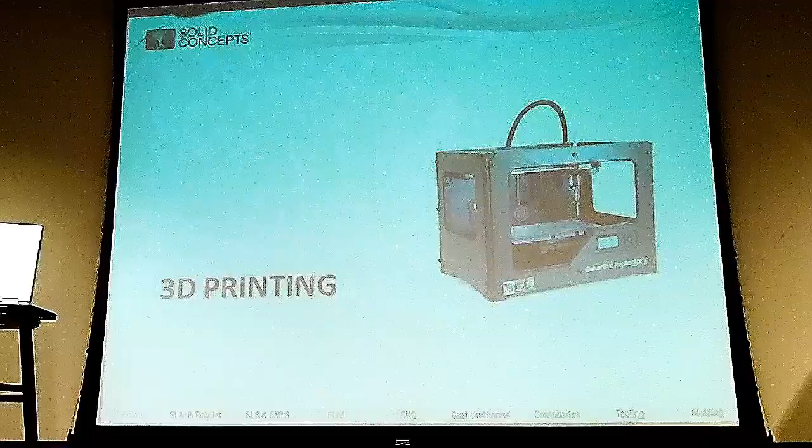Prototyping and 3D printing. It's been around for a while, but we're going to go into a little bit about what it does and what it doesn't do. So 3D printing, I don't know if you've seen it a lot in the news, but there seems to be a lot of hype on it, a lot of talk about it. What is it? What is it not?

And Gartner put together this group of technology and their expectations, and you start with a technology trigger, and you go into the peak of inflated expectations, the disillusionment, and the slope of enlightenment as it gets to actually a full production. So right now, 3D printing is right there. So there's a lot of claims out there, there's a lot of discussions.

Computer? No, the computer. Oh, thank you.

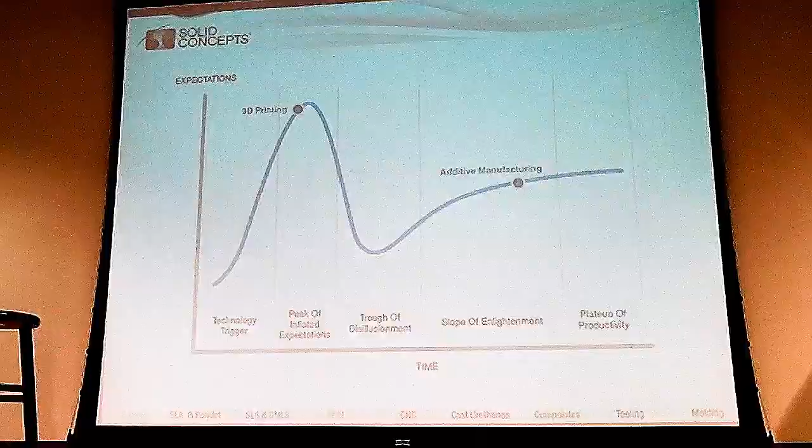There's a lot of discussions as to what it can do, what it can't do. You see things in the press every day claiming all these great claims. Now, one aspect of this is 3D printing, which is more of the desktop, has been around for a very short time, but additive manufacturing as a whole has been around for 20 plus years, SLA, SLS, etc.

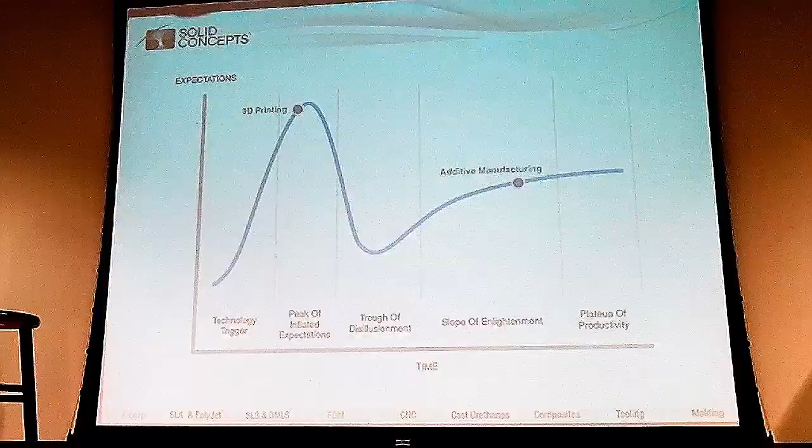And so, as you look at this, you can see the differences, and what I'm going to be concentrating on today is more additive manufacturing rather than the actual small 3D printers. They have their place in society, and they will grow, but additive manufacturing, which is more the commercial aspect, is what I'm going to be talking about today. So that's just the graph, the Gartner group, the different parts of it.

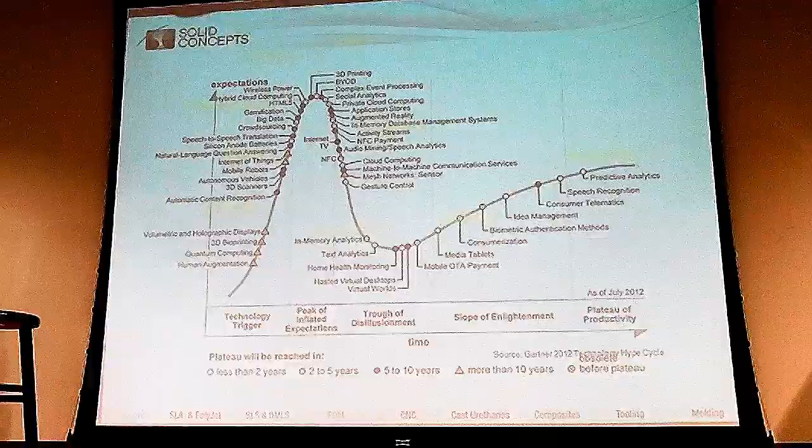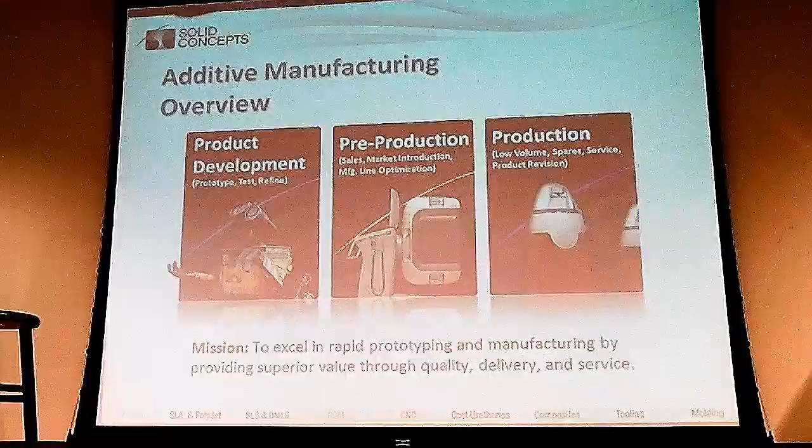This is 2012. So you've got the desktop here, and you've got the full-size commercial machine there. Big difference. And so what I'm going to go through today is product development, pre-production, and then production. Basically taking a concept to prototype and then hopefully to cash is what your goal is.

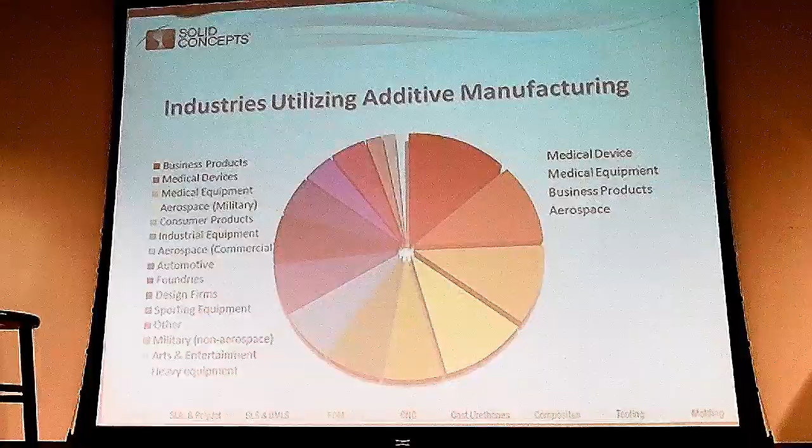These are some of the industries that utilize additive manufacturing. You can see the three biggest industries that our company focuses on are medical, medical equipment, business products, and aerospace. But we have all these other industries that utilize additive manufacturing.

What's nice about this is that you have a lot of cross-pollination. So you'll have one industry like transportation having one idea of how to use a 3D printed part, and you can transfer that same concept into another industry that hasn't thought of it or hasn't utilized it. So there's a lot of cross-pollination and utilization of technology.

So the additive manufacturing technologies that I'm going to go through today are PolyJet, stereolithography, 3D printing or Z-Corp, selective laser sintering, fused deposition modeling, and direct metal laser sintering.

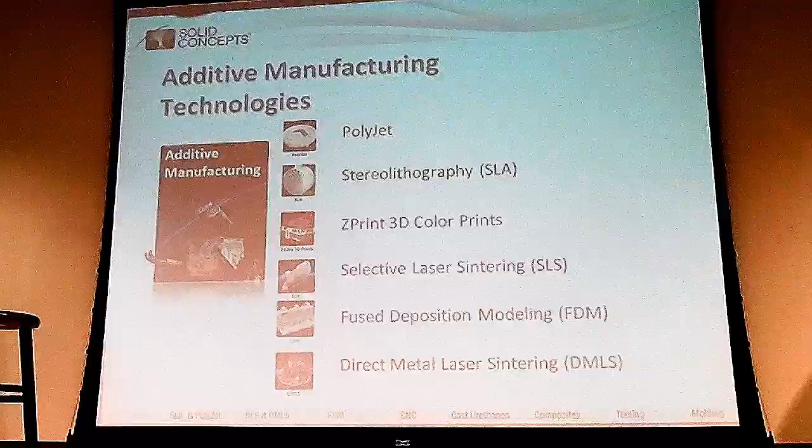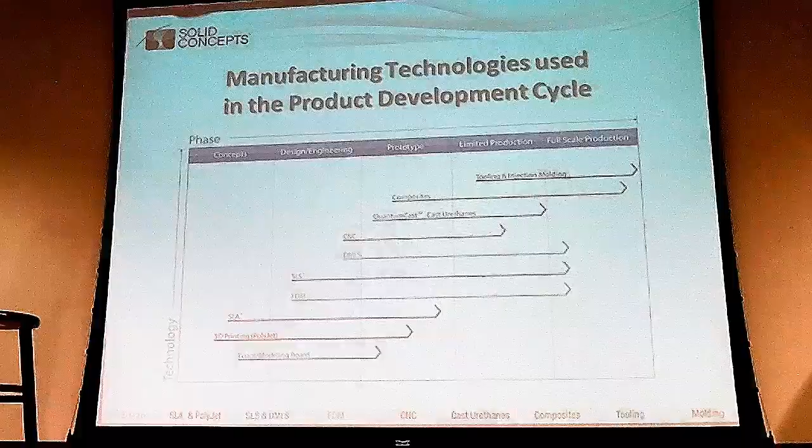This kind of gives a guideline of where the additive manufacturing process fits in with other technologies. You have CNC here, and SLA, FDM, SLS. So you can see how it goes from a concept, and it covers prototype. SLAs stop pretty much at prototype, and then you go limited production and then full scale. So each of the different additive manufacturing processes have different capabilities, and we're going to be talking about the pros and cons for each one so that you can get a good feel for that.

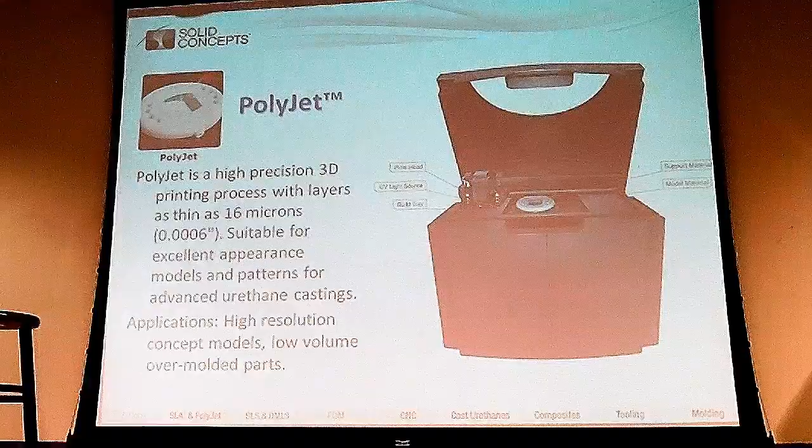PolyJet builds in 16 micron layers. It's essentially a print head similar to what you have in a standard printer, and it lays out both the material and also the support structure. So we're going to just...

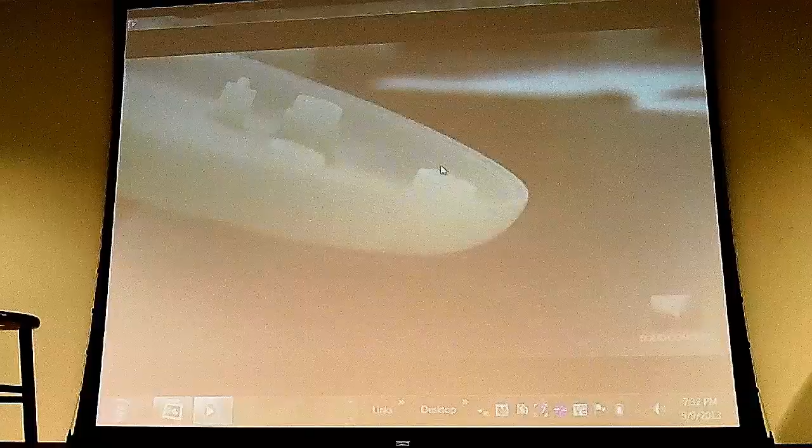PolyJet is a layer additive manufacturing technology used to develop plastic prototypes from 3D CAD data. This rapid prototyping process uses inkjet technology combined with UV curable materials to quickly and economically produce highly detailed and accurate physical prototypes. PolyJet is one of the fastest prototyping processes available to develop high-precision physical parts and is ideal for smaller parts, appearance models, and master patterns.

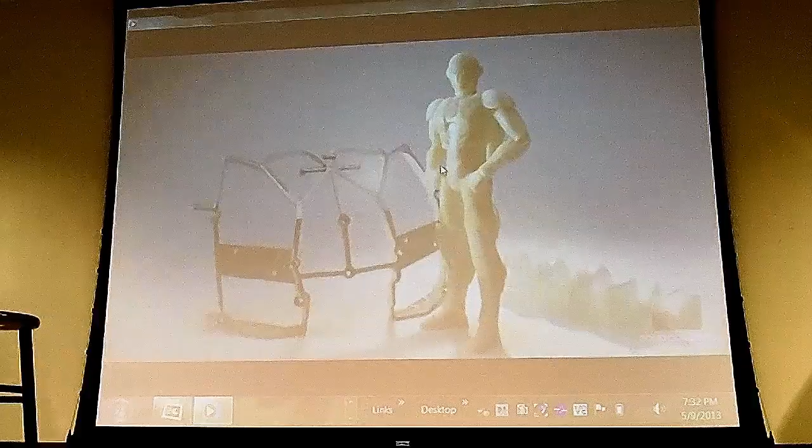The PolyJet process begins by slicing CAD data into cross-sections or layers as thin as 6/10,000ths of an inch. The data is then transferred to the PolyJet machine, which begins constructing the object one layer at a time. Similar to how an inkjet printer lays down pigment, the PolyJet printhead deposits small amounts of ultraviolet curable material on the build platform, eventually forming a single cross-section of the part. An ultraviolet light attached to the printhead simultaneously cures the material as it is printed.

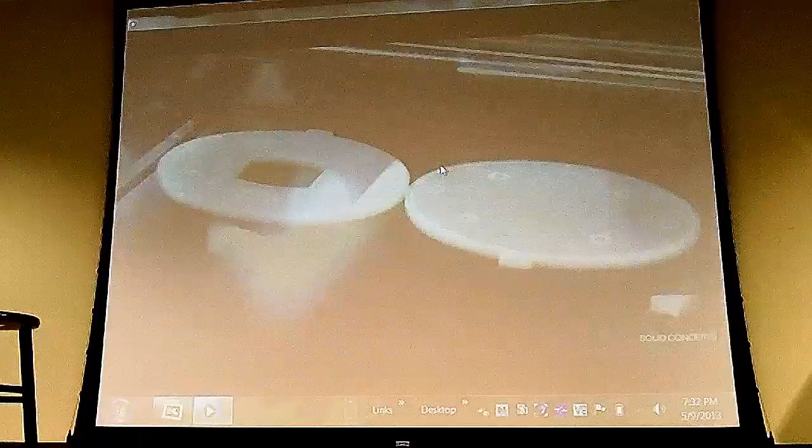Once a cross-section is complete, the build platform is lowered slightly to make room for the next layer. As the part is built, support material is added to give supplemental strength to fine structures and down-facing surfaces. After all of the layers have been created, the finished part is removed from the platform and cleaned.

Although finishing is not necessary, a number of hand sanding and paint options are available from service providers such as Solid Concepts. PolyJet parts are well suited for quick, economical prototypes requiring exceptional detail, surface finish, and edge visualization. PolyJet is ideal for a wide range of industries, including medical, entertainment, consumer products, automotive, and industrial design.

So PolyJet allows for models that are smaller, higher resolution models. You get very clean layer lines, so you can have a very nice printed model in a very short period of time.

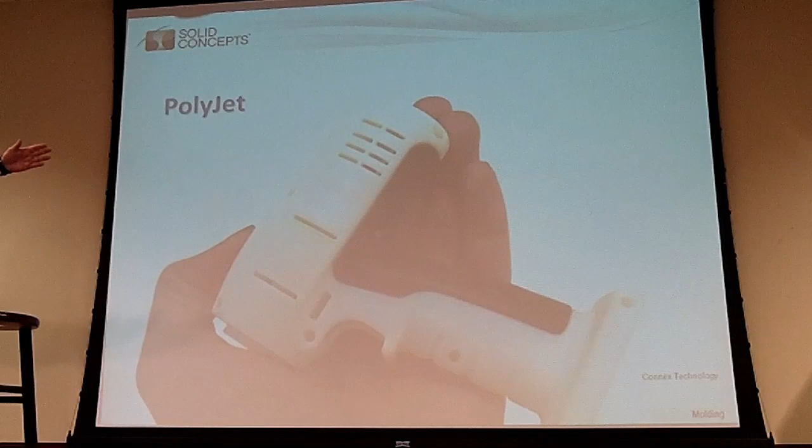And also with the Connex machine, you can do overmolds. No, it's actually, what's the name of it? Connex machines do dual durometer, sorry. It does dual durometer, so you can actually print, and you'll see the example up there. So one part is hard, and the other part is soft. So you can put two different durometers on each other and get a part out very quickly and efficiently.

We also have Zoom RP, which you can upload your data and allows you to get the parts the next morning. It's got a countdown timer, and if you get it in before the countdown timer, you can actually have it in your hands the next morning. It's just for quick services rather than owning your own.

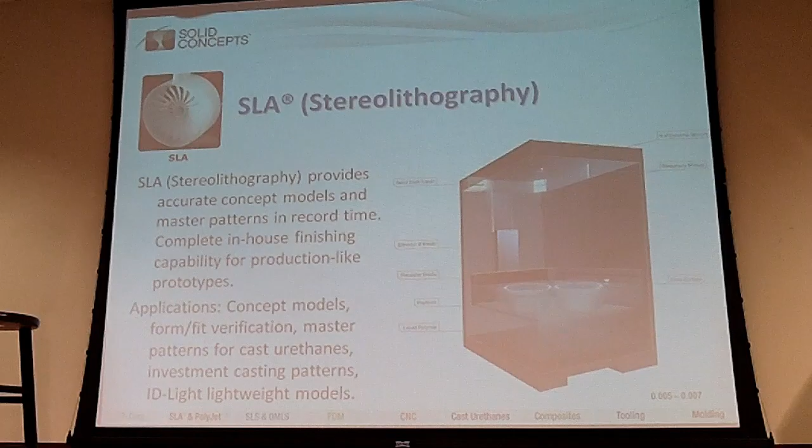SLA, again, we're going to go to another video.

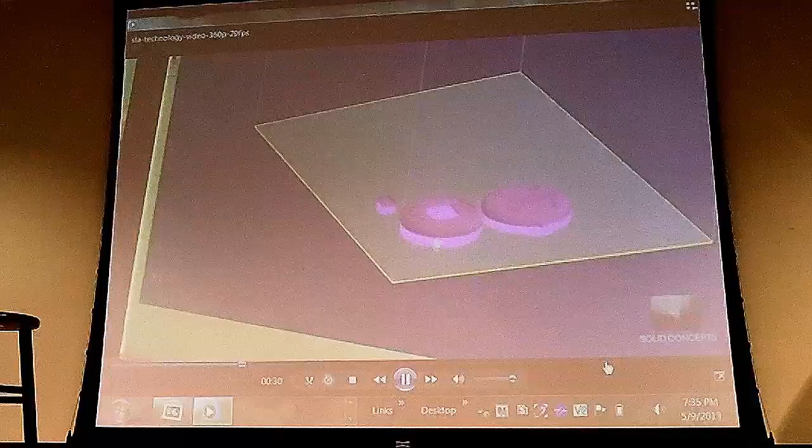The SLA process begins when CAD data is sliced into thin cross-sections or layers, typically about 0.006 of an inch thick. This data is then transferred to an SLA additive manufacturing system containing a vat of UV curable photopolymer. The machine begins to build the part one layer at a time. Each layer is constructed from an ultraviolet laser that is directed by X and Y scanning mirrors.

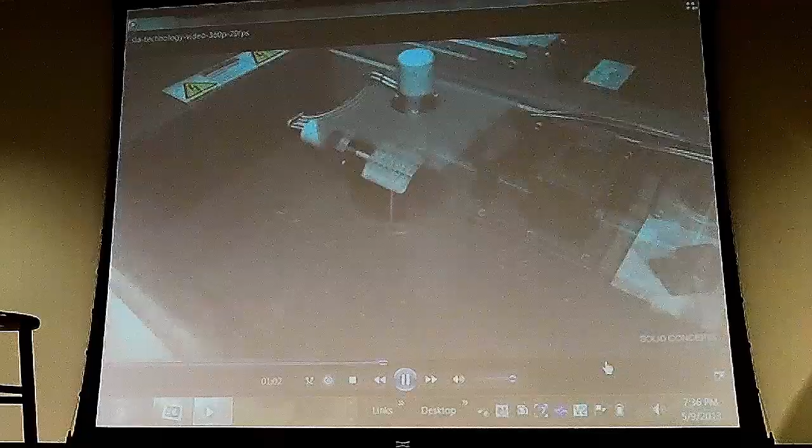As the laser traces the cross-section on the surface of the resin, the liquid material is hardened on contact. Once a layer is complete, the build platform is indexed down to make room for the next layer. A recoater blade moves across the surface, ensuring a thin coat of fresh liquid resin is evenly spread over the object. The laser continues to trace and form each layer atop the previous layer, building from the bottom up.

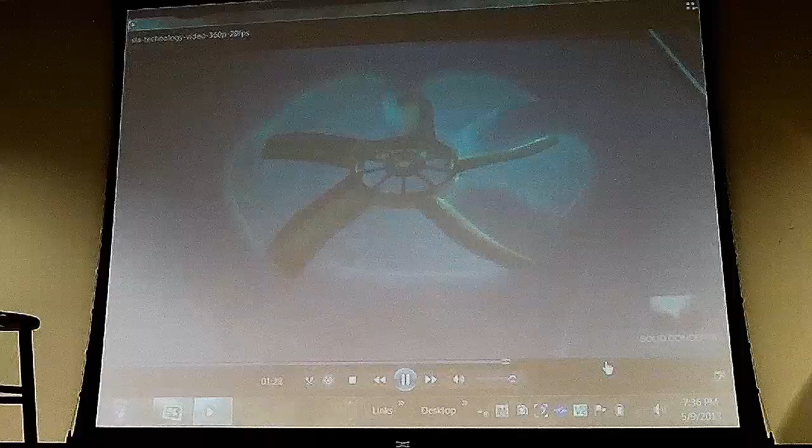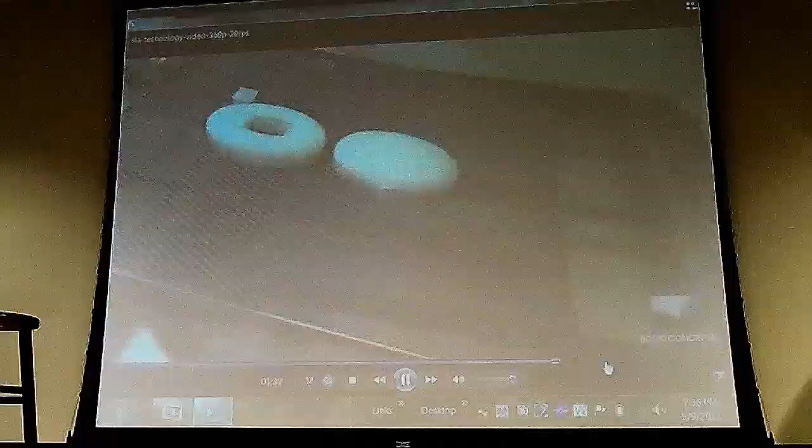The completed part is then carefully removed from the liquid and separated from the platform. A chemical bath removes excess resin, and the part is cured in an ultraviolet oven. Any support structures are removed at this time. With numerous hand sanding and professional paint options available through service providers such as Solid Concepts, stereolithography has become an excellent economic choice for rapid appearance models. A wide variety of industries have embraced SLA, including medical, automotive, entertainment, aerospace, and consumer products.

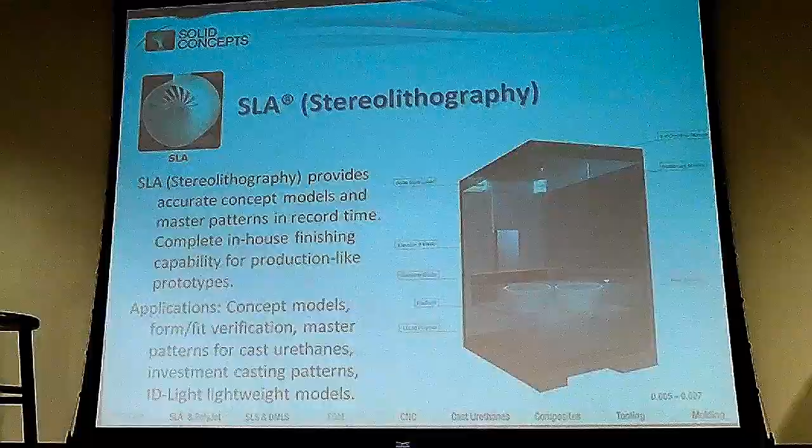So PolyJet is like a printer head, and it sprays down a liquid polymer that is photocurable. SLA is a bath that is tracing the part each and every time, so it's building from the bottom up. And you can get very large parts. So you can do architectural models, different wind tunnel testing. There's a variety of different materials that we have that you can do this with, but here's some examples of some of the ones that we've done.

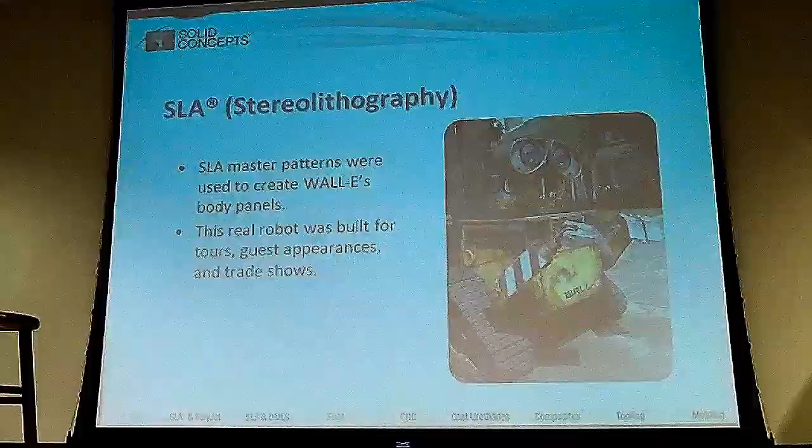This is Real Robot, Wall-E, we've done Iron Man. We actually did our own kind of Iron Man with stereolithography, and we call it ID Light. Typically this model would be about 320 pounds. He actually weighs only 29.5 pounds. He's 6'2". So it's literally a honeycomb structure that's supported by itself. That gives you a very large part that's very complex and can be painted very nicely. But again, it's just additive manufacturing. You're taking a technology and extrapolating on it to come up with different uses for it.

Another example, we have this one out in the foyer. Half of it's printed with SLA, the other half is cast urethane. So the SLA half is sprayed with soft touch paint, whereas the other half is cast urethane, and it's got the whole cast urethane process. So again, just by combining different technologies.

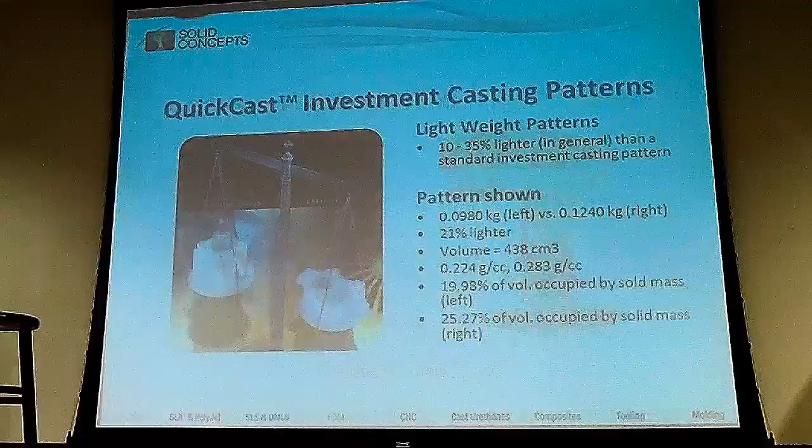QuickCast, I'm going to skip through this, but essentially it's like lost wax. Lost wax is for making metal parts. We've done some very large parts, as you can see. We've done turbines 8 foot across, things like that for cast.

Z-Corp is a fun one because you can get a part printed in 390,000 colors. So it comes out of the printer head in color. So when you print these, for example, I think I have an example up there, it actually comes out printed like this.

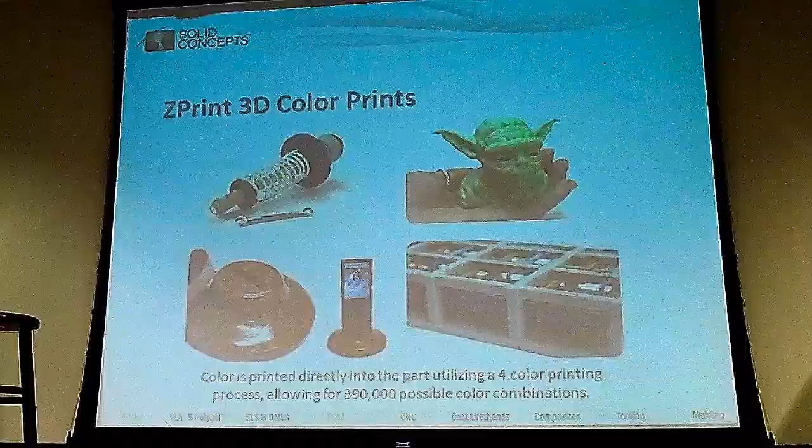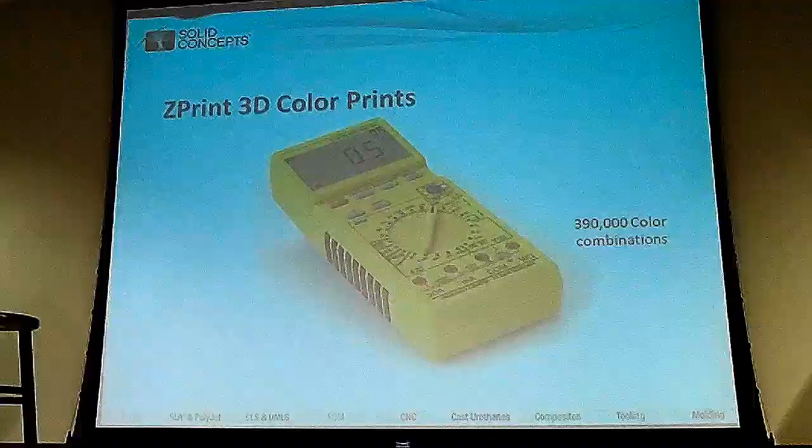So you're actually able to read the text on it. If you flipped it over, you could see where all the screw holes are. You could read the warning label on the back, everything about it. So it's very nice to have a part in your hand to show a potential investor, to show your clients that might be wanting to test something. You put something in their hand and you say, well, is that the right size for you?

You know, if it's a medical device and they're dealing with muscular dystrophy or one of the diseases, you want to make sure that it fits that client that it's going for. If it's for a car, how do your end clients use it? So being able to get it in someone's hand and validate it before you go to the injection molding process or you get too far down the line, or come up with different ways of doing it. So it's a fun way to get a product in your hand or in your potential customer's hands very quickly and test it out.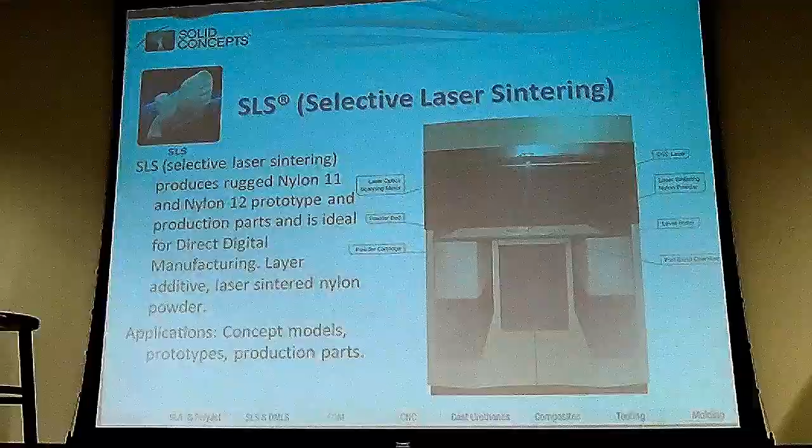Selective laser sintering is a process. SLA, Polyjet, and Z-Corp are all fit and form. In other words, they show a model, but they're not really durable. Okay, they're not durable parts that you can bounce, you can throw up against the wall. SLS is a completely different process. It uses nylon 11 and nylon 12 for manufacturing. It uses a powder-based system for printing that powder.

Selective laser sintering, or SLS, is a rapid prototyping technology that turns 3D CAD data into physical parts in a matter of hours. SLS is an additive manufacturing technology that uses powdered nylon 11, nylon 12, and PEEK materials. Parts produced are lightweight, highly durable, and both heat and chemical resistant, making SLS an excellent choice for producing production parts without the expense of tooling. The SLS process begins by slicing 3D CAD data into thin cross-sections or layers. The data is then transferred to the SLS additive manufacturing equipment.

The machine then begins to create the first layer. After a leveling roller spreads a thin layer of powdered material across the powder bed, the CO2 laser traces the cross-section on the material. As the laser scans the surface, the material is heated and fused together. Once a single layer is complete, the powder bed is lowered to make room for the next layer. More material is introduced from the powder cartridge and rolled out smooth, while unused material is recycled. The process is repeated, building layer upon layer until the part is complete. As SLS parts are built, they are encompassed by unsintered powder, which provides supplemental strength and eliminates the need for support structures. Complex designs and assemblies, once thought impossible, are now being redesigned with SLS as cost-effective integrated structures.

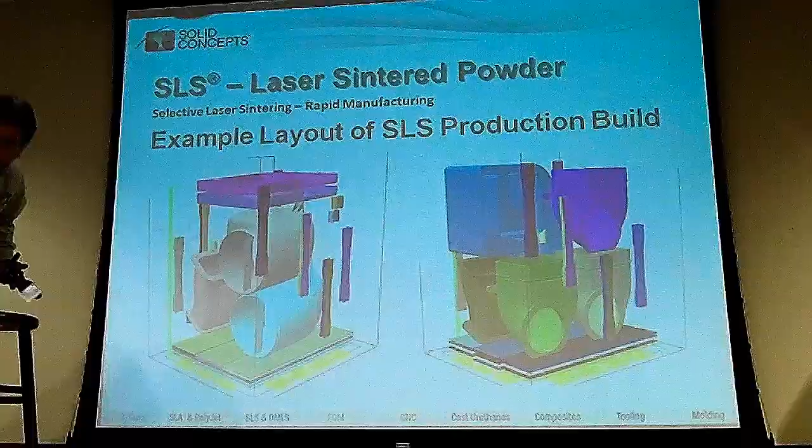So SLS is basically a powder nylon, 11 or 12, and you're able to print it. So what's nice about it is that, unlike many of the other ones that require support structure, it has its own support structure as it's building. The powder is its support structure. So you can do very complex parts and shapes that are very durable. This is an SLS piece, that's strong and durable. You can throw it on the ground, it'll bounce back up. It's strong. They're used in aerospace, they're used in automotive. I'll show you some examples of that later.

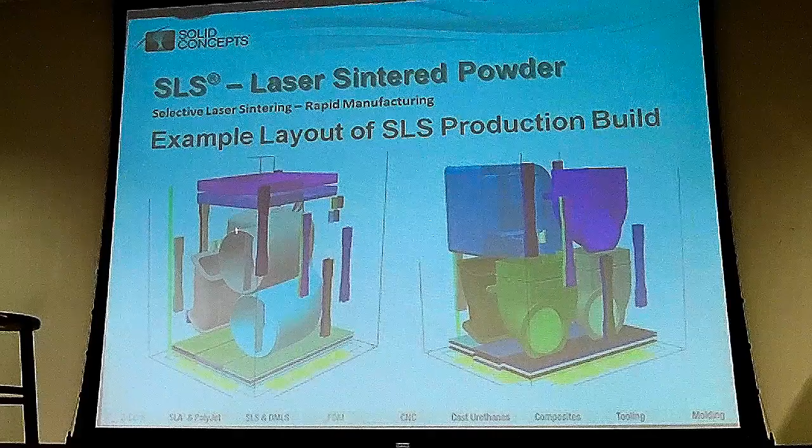But essentially, you can stack the different parts in there, basically 10 thousandths between them. You can fill the entire tub full of many parts. Last year we did 218,000 unique geometries prototypes. A majority of that was printed, because you can fill up a unit completely.

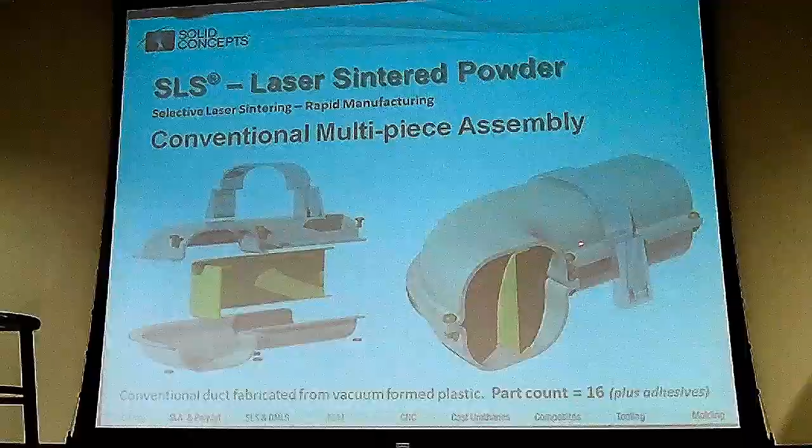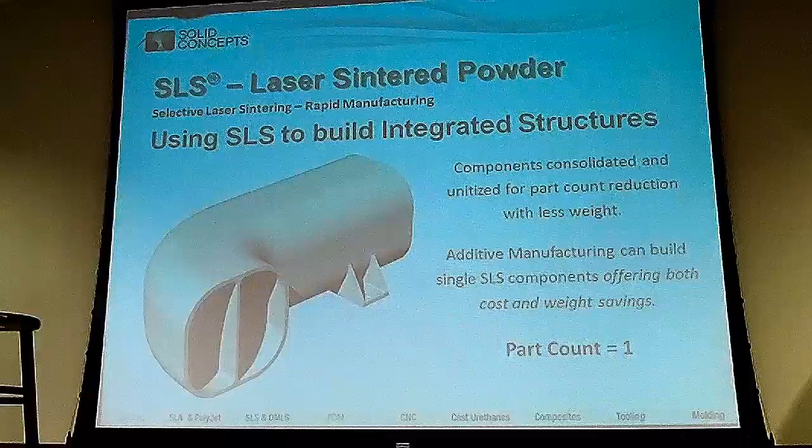One of the other aspects of it is that you can take a conventional multiple piece assembly. So if this was on an airplane and you had 16 parts on it, there's a lot of points of failure. But if you build it in SLS, you can have it as one unit. There's no points of failure. And you can actually attach dog tags to it, so you have traceability all the way back to the material, when it was built, who built it, etc. So there's a lot of benefits to using SLS for rapid manufacturing and actually creating parts.

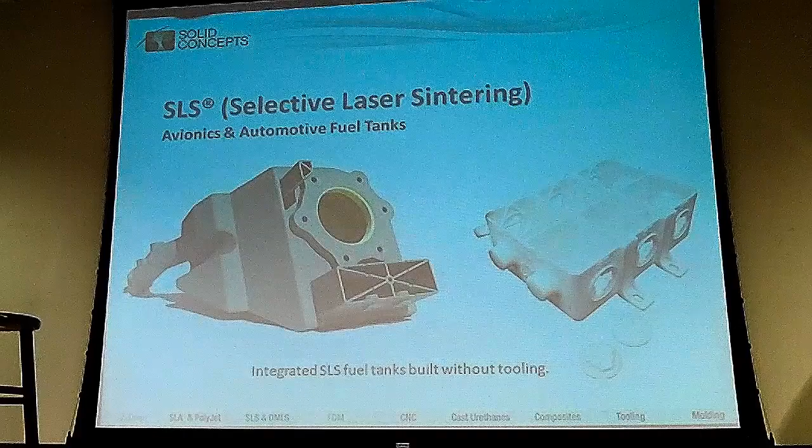Conformable gas tanks is something that the UAV industry has been using a lot. So when you want to take an unmanned aerial vehicle and you want to maximize the amount of gas in there, you can push it into areas that would be impossible to mold. But if you're able to grow it from an SLS perspective, it can cover wires, it can go around different branches, it can completely utilize the space to the maximum ability. So it's conformable in that sense. And then it can be coated, and it will hold liquids.

I was talking with someone today, they were talking about a project that they did for Beckman Coulter, and it was actually for slides. And it was holding these slides for cleaning. So it would actually hold the cleaning solution in the slide, and it was for production parts, you know, to clean the slides through the process.

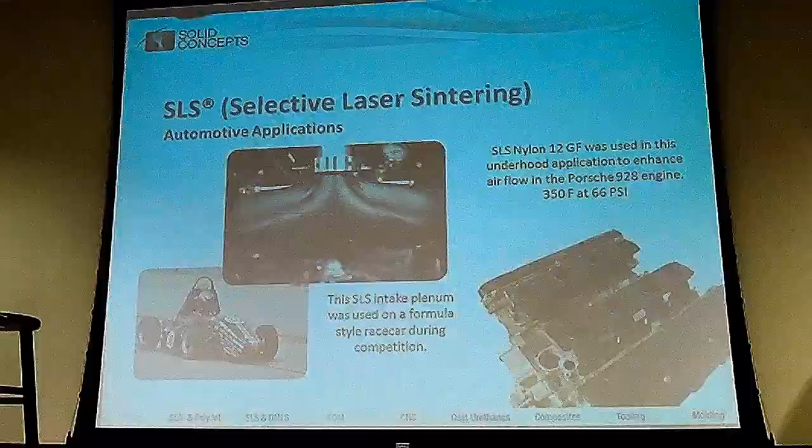SLS can also be used, it's very functional, 350 degrees. This is used on Porsche for underhood applications. The dashboard on this racing team, we did all the dash parts of it, and rather than doing complex machining parts, you're able to grow the part in SLS and get it up and functioning in a matter of days rather than weeks.

And you can change it. It's a digital file, so if you want a different file, you go print it. It's not something that you have to go back and then redo the machine. Yes, you have to change the CAD file, but you can have it up and running, and you can have it literally the following day.

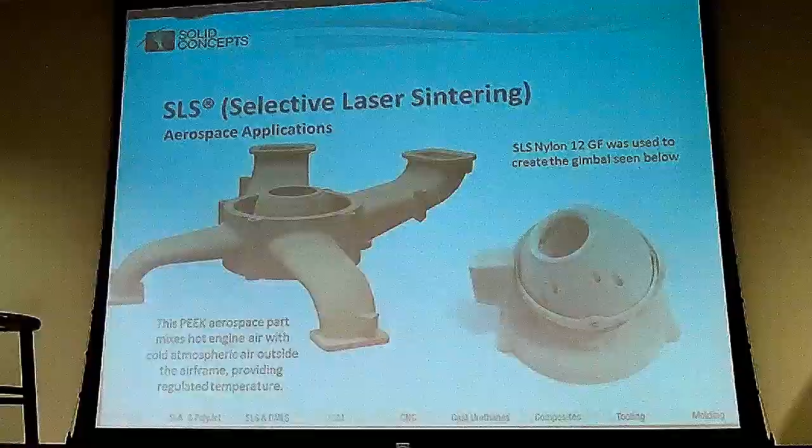This is the application that was talked about on video. They're having a hard time with this one as far as the welds and stuff. Four of these fly in every Apache helicopter. It's made out of PEEK. We have one of the two or three printers that actually print PEEK with SLS in the United States. There's a gimbal printed as one piece. So you can do very complex shapes.

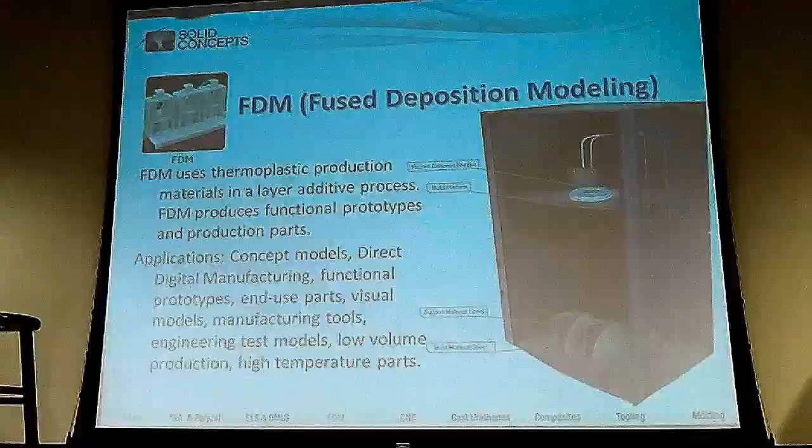Fused deposition modeling uses true thermoplastics, and we'll see a little video on that too. You'll see this part out there. What's nice about fused deposition modeling is that you can have very complex shapes. This is done on the same machine as this. This is hand finished. This one's coming straight off the machine. So you can see the difference. It's hard back there, but you can see the layer lines on it, whereas this one looks like an injection molded part. Let me just get this up.

Fused deposition modeling, or FDM, is a layer additive manufacturing process that uses production-grade thermoplastic materials to produce both prototype and end-use parts. This technology is known to accurately produce feature details and has an excellent strength-to-weight ratio. FDM is ideal for concept models, functional prototypes, manufacturing aids, and low-volume end-use parts. The FDM process begins by slicing 3D CAD data into layers. The data is then transferred to a machine, which constructs the part layer by layer upon a build platform.

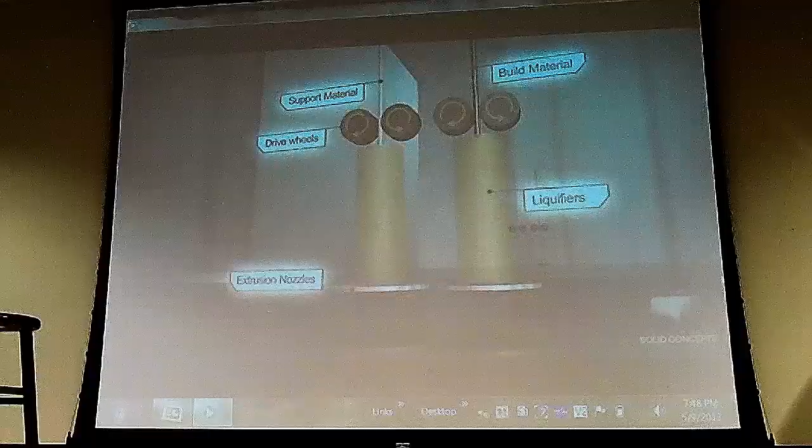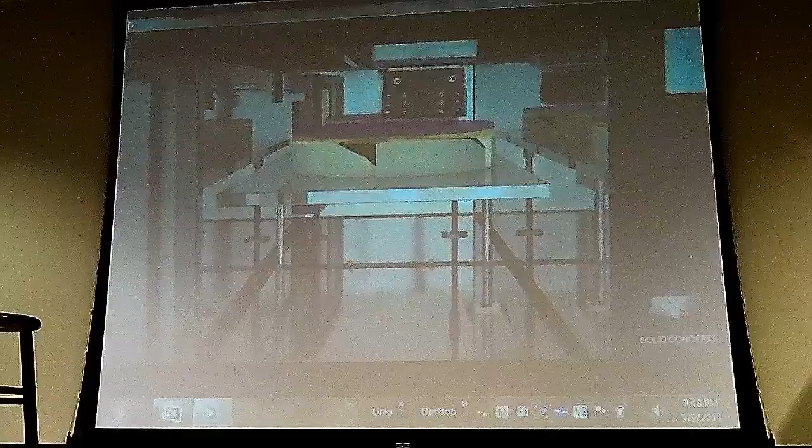Thin thread-like spools of thermoplastic and support material are used to create each cross-section of the part. Similar to a hot melt glue gun, uncoiled material is slowly extruded through dual heated nozzles. The extrusion nozzles precisely lay down both support and thermoplastic material upon the preceding layers. The extrusion nozzle continues to move in a horizontal XY plane while the build platform moves down, building the part layer by layer. The finished part is removed from the build platform and cleaned of its support material.

Raw FDM parts have visible layer lines. However, service providers such as Solid Concepts offer multiple finishing options to create smooth, even surface parts including hand sanding, assembly, and cosmetic paint. Since FDM parts are constructed with production-grade thermoplastics, including ABS, polycarbonate, and Ultem, they are both functional and durable. FDM is utilized in a number of industries, including aerospace, automotive, industrial, commercial, and medical.

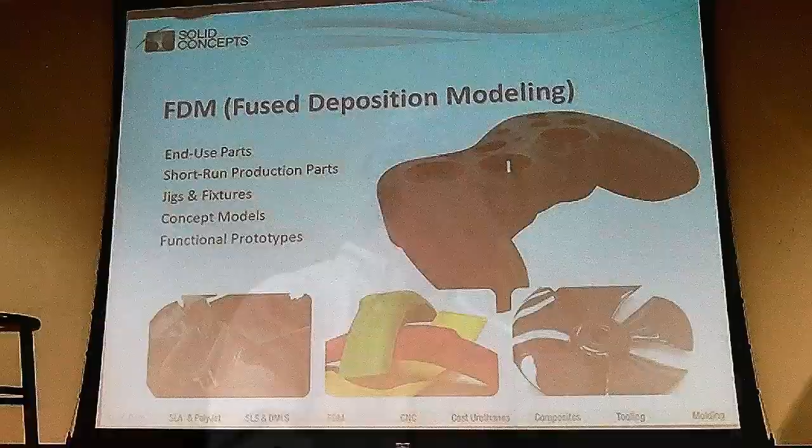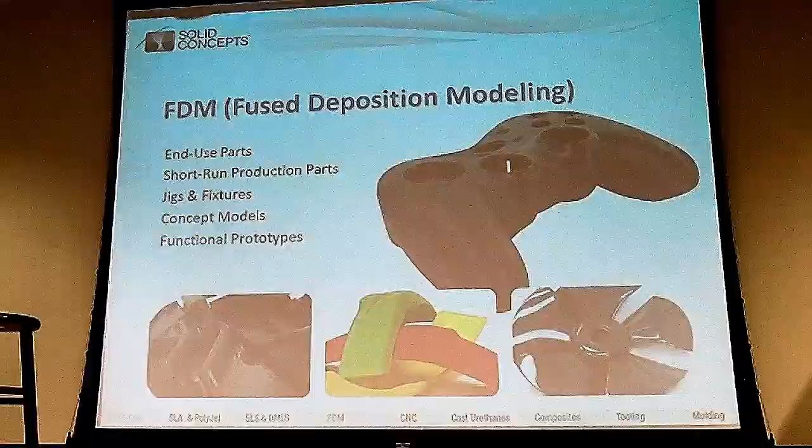So basically you can test out the product in the type of material that you're planning to use for injection molding, which is very unique. That gives you some flexibility. Again, each of the different additive manufacturing processes has pros and cons. Why would you use one over the other? So end-use parts, short-run production, jigs and fixtures, FDM is great for that because it prints extremely flat. If you want to mimic sheet metal, it's great for that because it will print large flat panels with no potato chipping at all. Concept models, functional prototypes. So you can get a lot of different varieties of parts. But again, each has got its niche.

This is a part that's used in aerospace. It's about 20 inches long. I think it was 15 to 25 parts before, and it's now down to one. You even have the wire ties attached to it, so that you're not having to go in there and glue. Even those wire ties might be a penny a piece. Trying to maintain them, get them glued in the right place, etc. By building a part so it's self-sufficient, you no longer have to maintain that.

With aerospace, you have to keep the tools around for 20, 25 years plus. If you have a digital print, you don't have that requirement. You basically keep the digital print around. The largest part is 36 by 24 by 36 as a single build. They can also be segmented together.

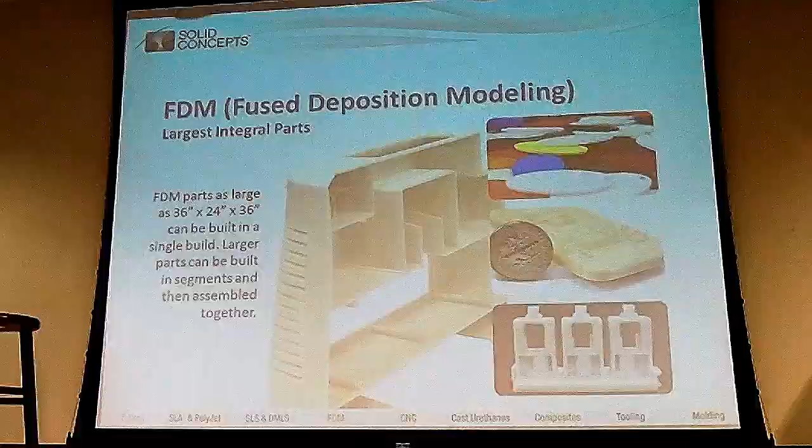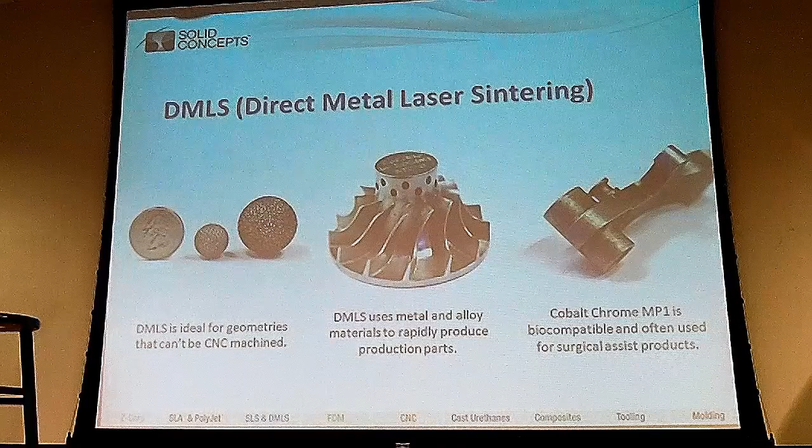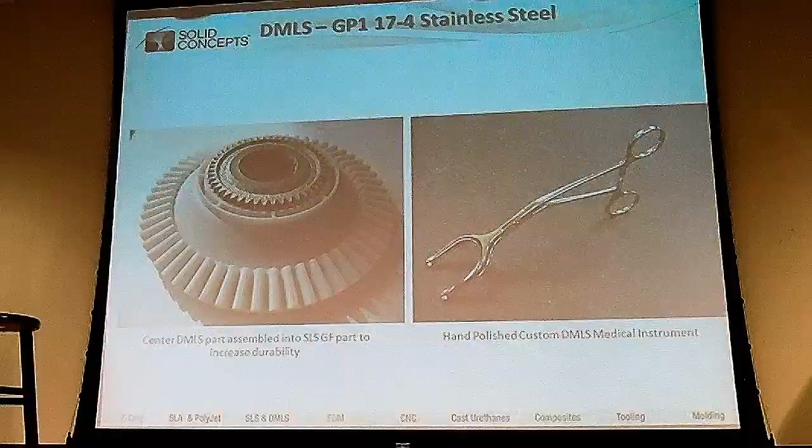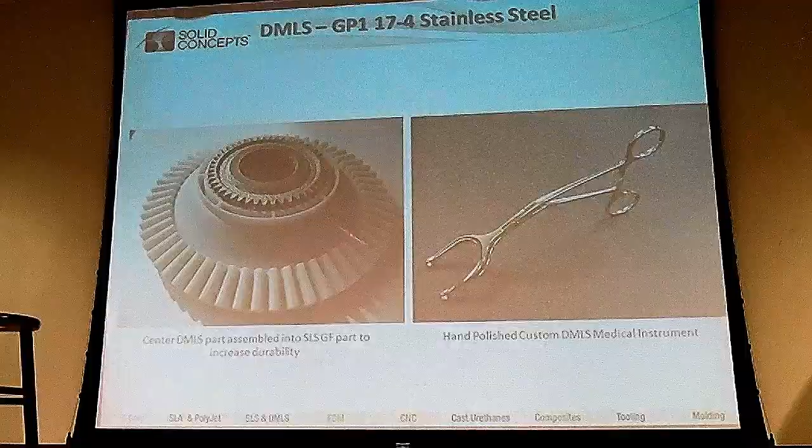DMLS, compared to billet or rod material, is between 3 and 11% stronger because of the way it builds. It's got less flexural strength, but the way it's designed, the tensile strength is extremely strong. So we do 17-4, 15-5, cobalt chrome, titanium. And this is a unique one because you basically utilize 2 different additive manufacturing processes. You've got the DMLS in the center, and then you've got the SLS on the outside. So you've got the strength where you need it, and you've got a weight reduction on the outside.

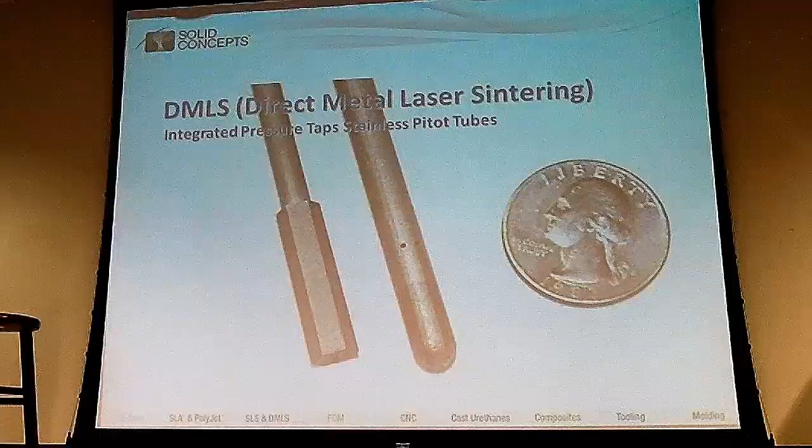These are some pressure taps, stainless steel, again, small parts. The size is pretty much 5 by 5. We can extend beyond there, but that's a sweet spot for it. Cooling channels built right into an injection molding part. That would be very hard to do.

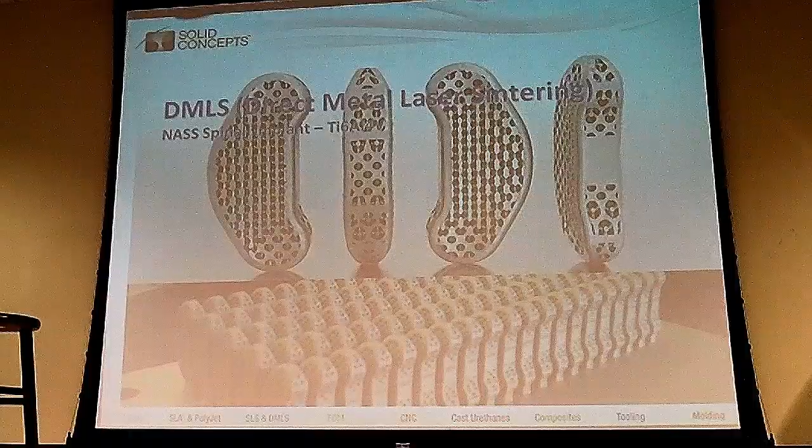DMLS for titanium and putting implants in the body. This is an area that's going to continue to grow. No one wants someone else's knee put into their body. You want something that's sized for your body. If you need a hip replacement, if you need a knee replacement, if you need cosmetic surgery, you want something that's appropriate for your body. So this is an area that's going to continue to grow, where they're scanning the person's body, they're figuring out what sizes, and they're printing it for that person. It's truly where additive manufacturing benefits the medical community.

So how do you choose? You've got applications, you've got a conceptual model. We saw some conceptual models out here today. We see some functional models. How do you choose when to go with a conceptual or functional? The part size, the resolution, material accuracy, delivery. There's a lot of aspects of it. You've got all these different additive manufacturing processes. So when do I choose? Which one do I choose? And how do I choose it? So we put together a chart. It's kind of hard to see. I don't know if you can see it from back there.

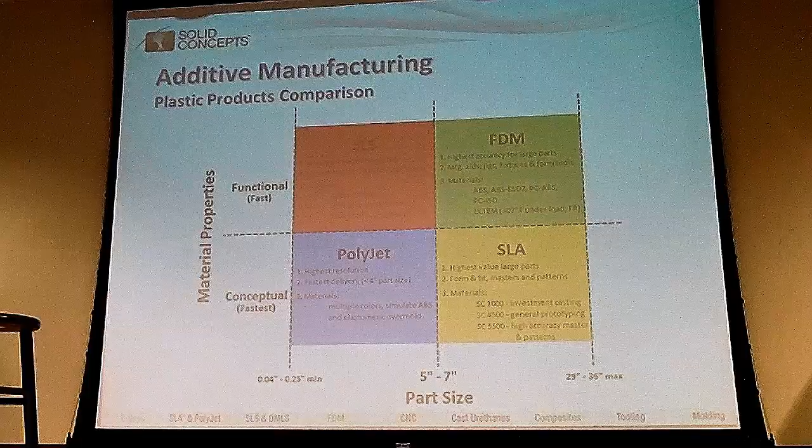You've got SLS, FDM, Polyjet, and SLA. So this side of the chart is basically if it's 5 to 7 inches and smaller, it fits an SLS or Polyjet. Do you want a form and fit part, does it look right, does it feel right in your hand? Then it's Polyjet or SLA. If you want a functional part, it's SLS or FDM. It kind of gives you a matrix to work from. Are there exceptions? Absolutely. But it gives you a matrix to plug and play some of your technologies. We saw some smaller parts. I'm sure there's some bigger parts out there too. But you can choose which one is best. And our engineers will help guide you through choosing which one is right for you.

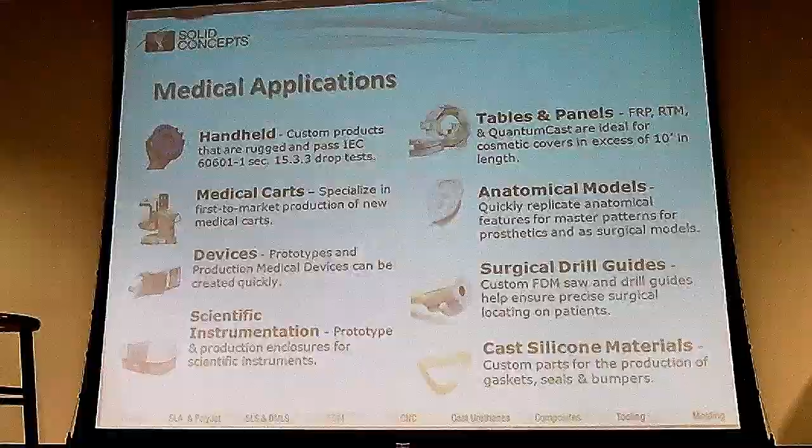Medical applications is where we do a lot of our work. Handheld, carts, devices, scientific instrumentation, anatomical models. The need in the medical industry is huge because it's speed to market, getting a product in market, making sure it's valid. I've been working with a human factors group recently for the 510K process, getting a part in hand. Can the person that's going to be using this medical device push the button? Do they have the strength? Is the button located in the right place? Are they using it left-handed, right-handed? So it's getting the parts in someone's hands, validating what you think is right before you go too far down the road.

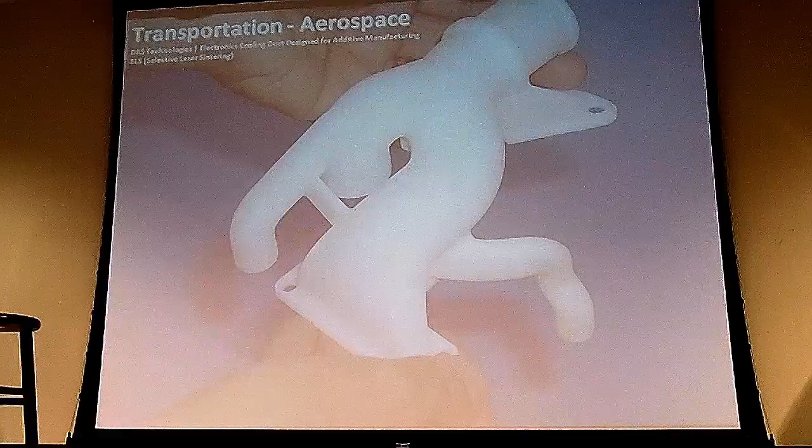So all the additive manufacturing processes can really shake your brain up and make you think. There are some very specific areas that are growing. Transportation is one of them. Aerospace uses a lot of additive manufacturing. As I mentioned, prosthetics and reconstructive surgery is an area that is necessary, and it's going to continue to grow.

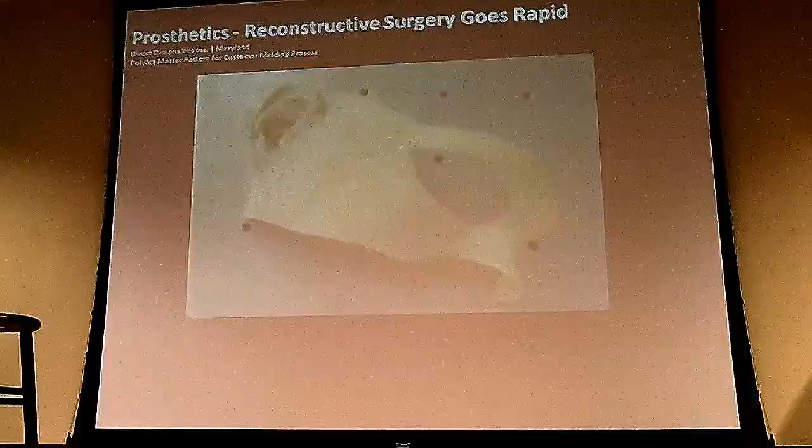We're seeing more and more of the DMLS and things like that. QuickCast for patterns, finding the right part. This is more for a generic, but even creating the parts that are the right fit.

For example, right now, if you go into hip surgery, a lot of times what they'll do is they'll literally take out 3 packs. They'll take out, let's just make up a size 5, 6, 7. They'll try 5. No, that's too small. They'll try size 6. Well, that fits right, but let's try size 7. So they've opened up 3 packs to test and get one, and yet they're all functional parts. That's a huge waste of money.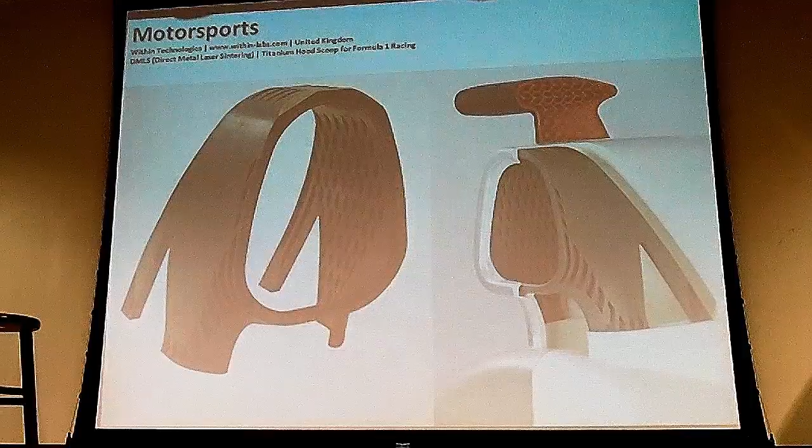So if you can figure out a way of getting something exactly for the person that they need, you're minimizing the cost and you're reducing the cost. Copings and bridges, that's a big area. Motorsports, taking parts and, I'm forgetting the word here, but basically you're shelling out the insides so that you're reducing weight but still having the strength.

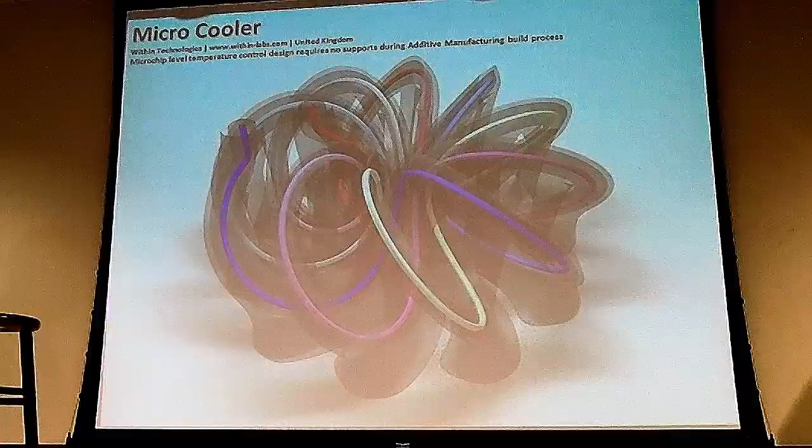This is a micro cooler, just an example of one that required no additional support structure. They designed it understanding the additive manufacturing process in order to circulate air. Here's a heat exchanger. Again, if you understand the processes and the abilities out there, and we have design guidelines up on our website, you can understand why you want to do it one way.

With a different additive manufacturing technology, you need to change your design or approach it from a different perspective. And if it's just an iteration, if you're planning on going to injection molding, you can still use the technology to help guide you through that and make sure it's correct.

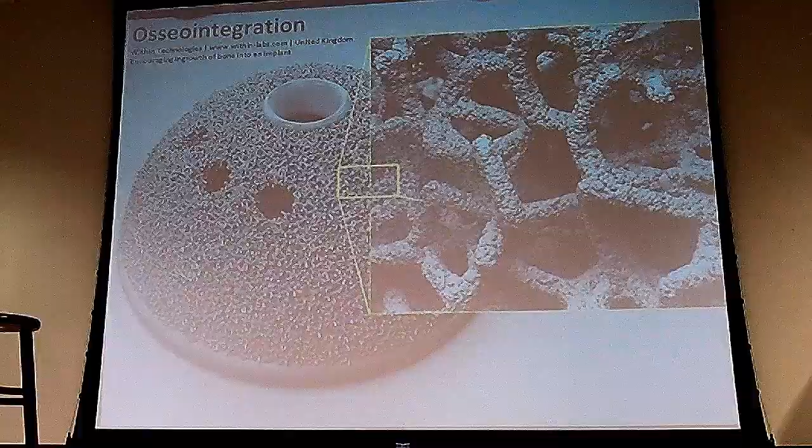Osseointegration, basically making it so that the bones can grow around the parts and actually grab onto them. If they're smooth, the bones are going to have a hard time grabbing onto the structure itself. But if you create a lot of matrices in there, you can allow the bone to grab onto it and have strength and durability. This is just a liquid lattice.

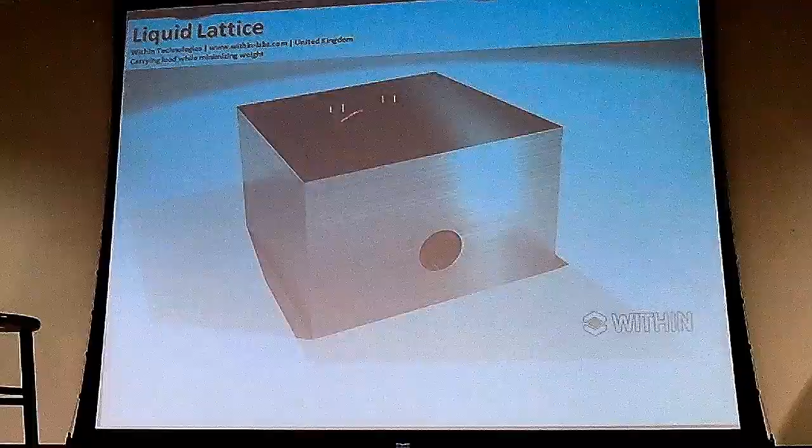If you were to take that concept and you need to have a full strength part, you would typically start with this and maybe take out some of the parts. But again, with liquid lattice and utilizing the technology, you can still have the strength and structure and still have those holes going through, but without all the weight. So again, it's just thinking about it from a different perspective.

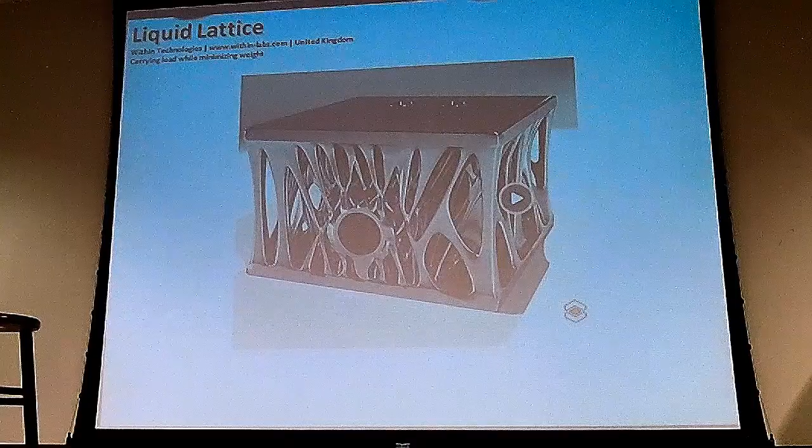Most people approach creating a product from the injection molding side. This is taking it from a different perspective. You've kind of got to twist your mind and look at it from a different perspective. There are no rules with printing. There are rules with printing, but they're different than injection molding rules. You can have undercuts, you can have complex shapes, you can have a lot of different things that wouldn't be acceptable in injection molding or would be very challenging. You can actually build a part that way.

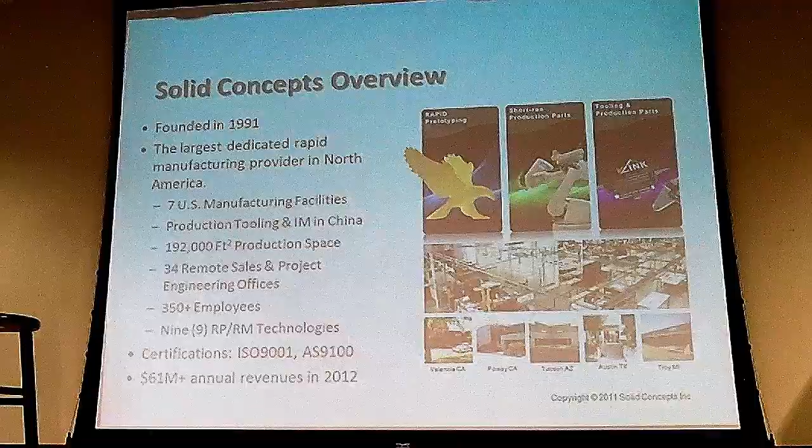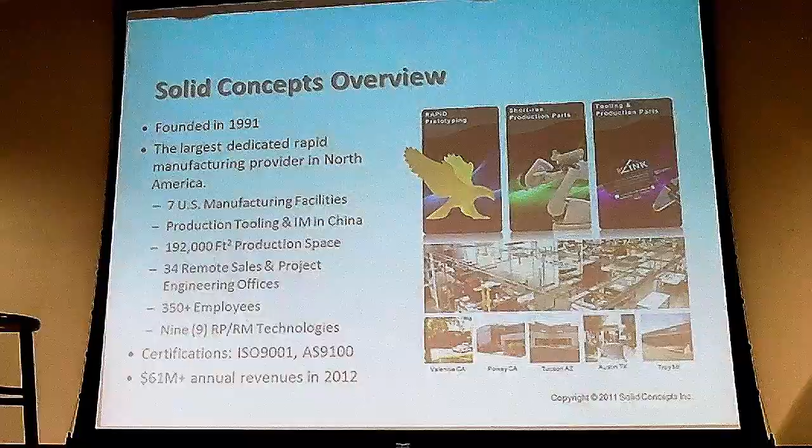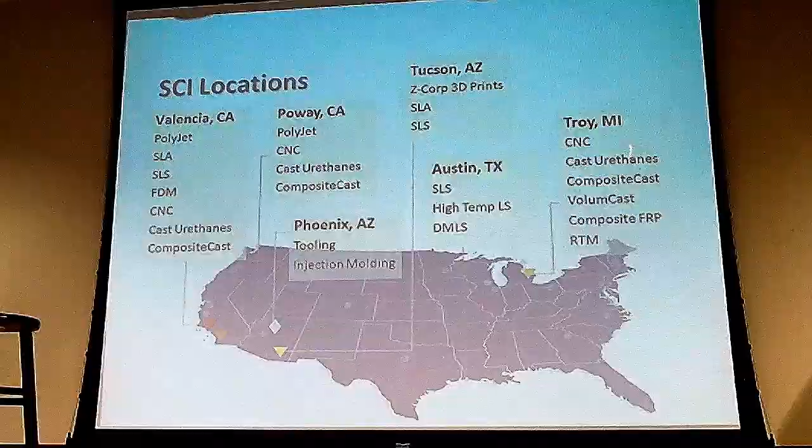So who are we? We were founded in 1991. We have 7 manufacturing facilities. We have 192,000 square feet of manufacturing space, 9 technologies, 350 employees, ISO 9001 and AS 9100. We're a $61 million company. These are some of our locations: Valencia, Poway, Tucson, Austin, Troy, Michigan, and Phoenix. So we've got a lot of redundancy, which is nice.

I don't know if you guys remember when the power got knocked out about 8 months ago. Someone flipped a switch. In those kinds of situations, what's nice is that we could actually transfer to a different location if it were a longer period of time, because of redundancies.

We have 77 additive manufacturing machines, which again, I'll have clients come up to me and say, I want one in FDM and one in SLS, so I can compare them. And then I'll order 10 and actually do my testing on that. But sometimes they don't know exactly what they're trying to achieve with the part, so they'll order one of 2 different materials, or they'll take 2 different SLS. I want one glass filled, and I want one aluminum filled.

And by doing that, they're able to find the one that they want, and then they can produce more of them for testing and validation. But by having so many different machines and also 50 different materials, you've got a lot of choices. And I've found that to be very helpful to customers, and they're really appreciative of it.

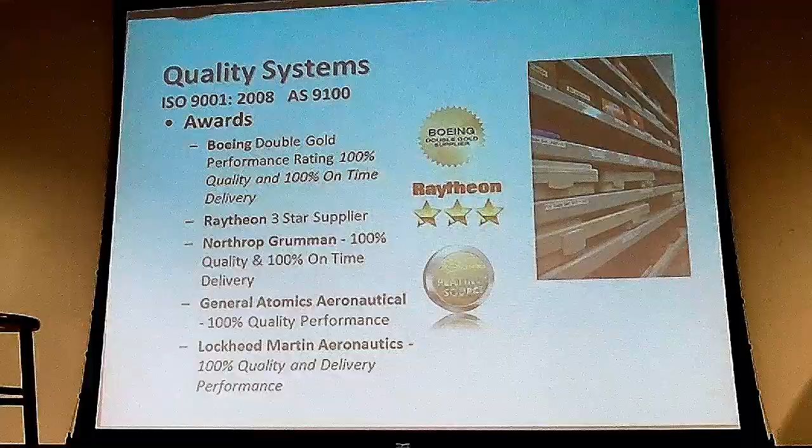Full finishing capabilities. We're, like I said, ISO 9001 and AS 9100. We have Boeing, Raytheon. Some of these are all aerospace, but they're awards, as most people in aerospace know. They're hard to get and even harder to maintain.